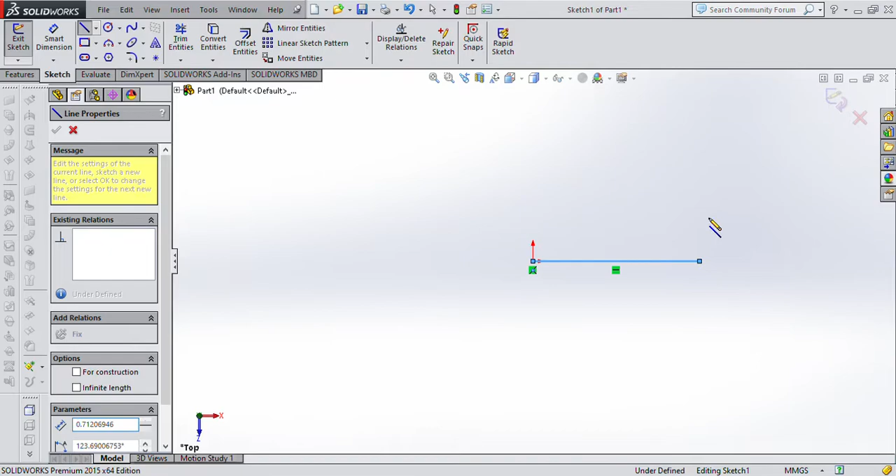Now we are going to continue with part design, and I will try to draw some parts which are a bit complicated. Open a new page and select top, normal to. Line, sketch line, start from the origin point and create this sketch. This should reach to this point.

Now fillet, sketch fillet, 12. This one here, here and here is 12.

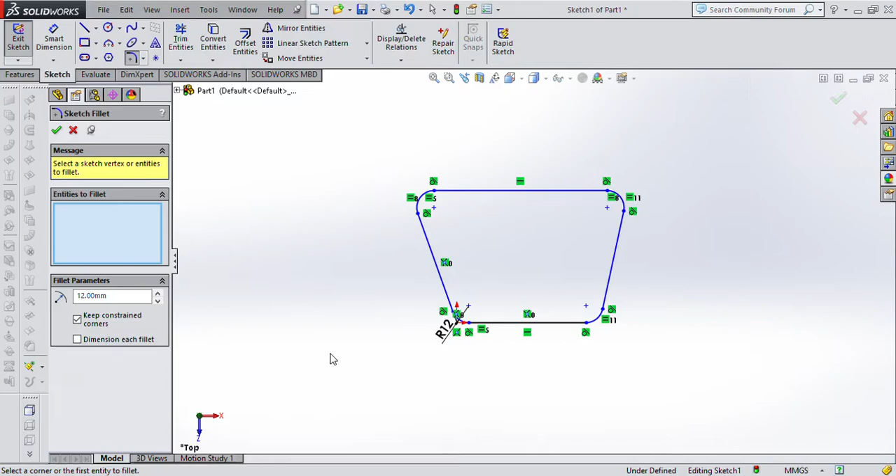Now dimension, smart dimension. Between the center of these 2 points is 84, and this one is 70.

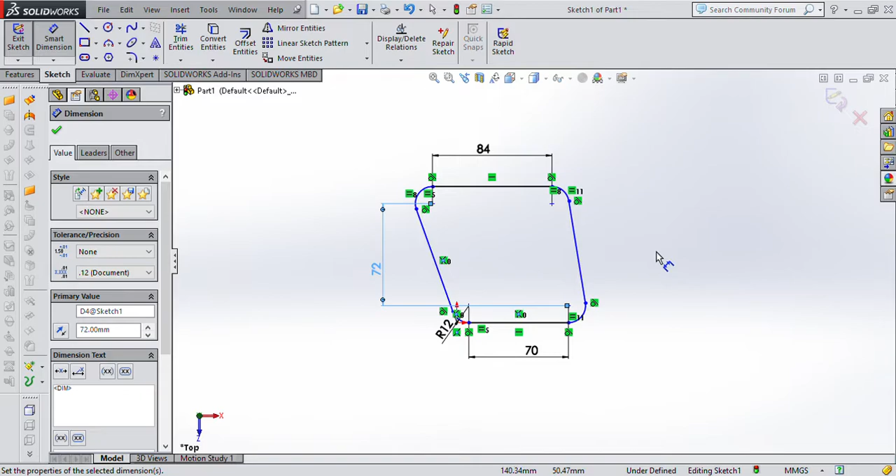Height here to here is 72. This 2 is equal. Okay, we have a sketch. This is my base sketch. It should be black.

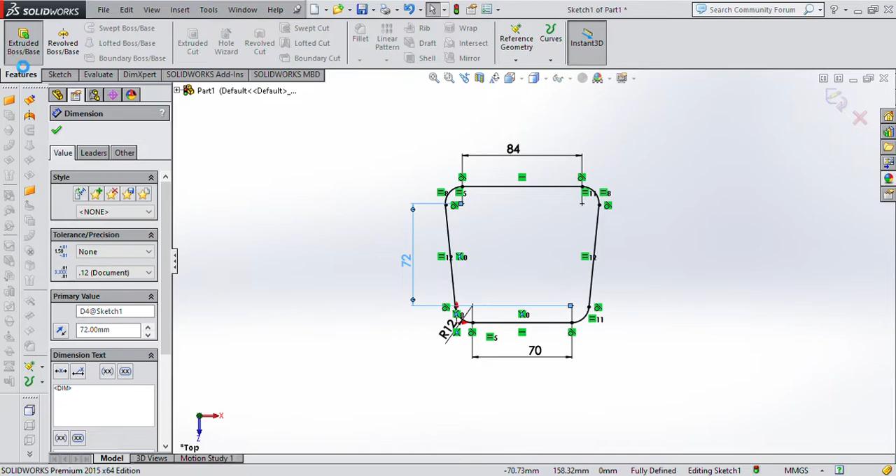Now I'm going to continue with extrude, 10, and confirm.

I have some holes here. One possible way is creating the sketch here, but since I have 4 holes, I may go to feature, new, the tool as hole wizard, feature and hole wizard. We have some choices here. I'm going to select hole.

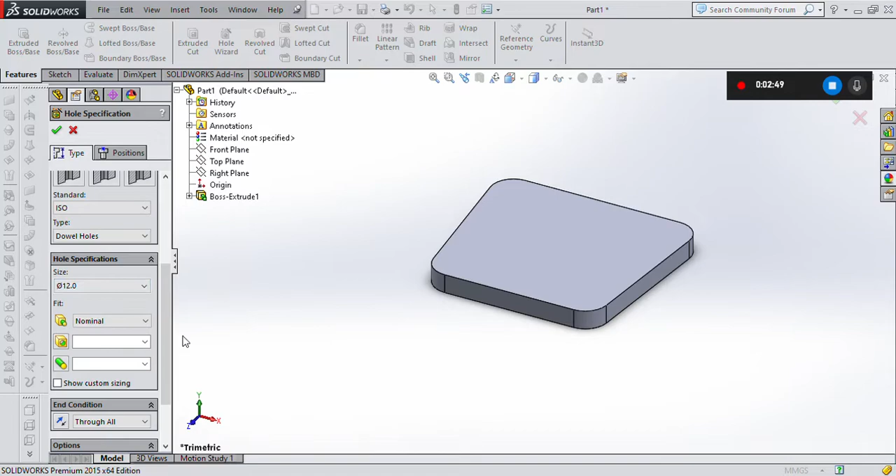The system which I'm already working with is ISO. In my case it's through all, and the size which I'm looking for is 12. So this one should be hole, this one is 12. Now go to position here, click on a point, another point, one more point and one more point.

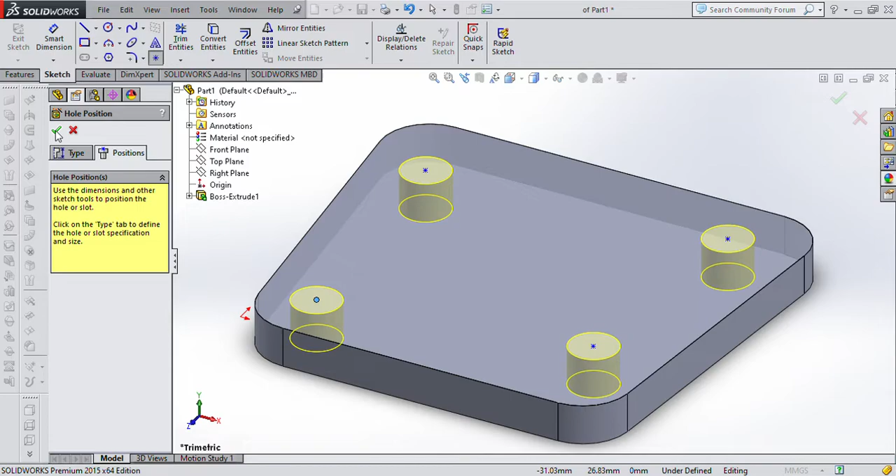When you are looking at these points, the center of the points is blue. It means that they need dimension. Just confirm your hole wizard. Now you have this feature.

Open this feature and find the first sketch of this feature. Right click on it, edit sketch. Normal to, you can see the center of the holes here. This point.

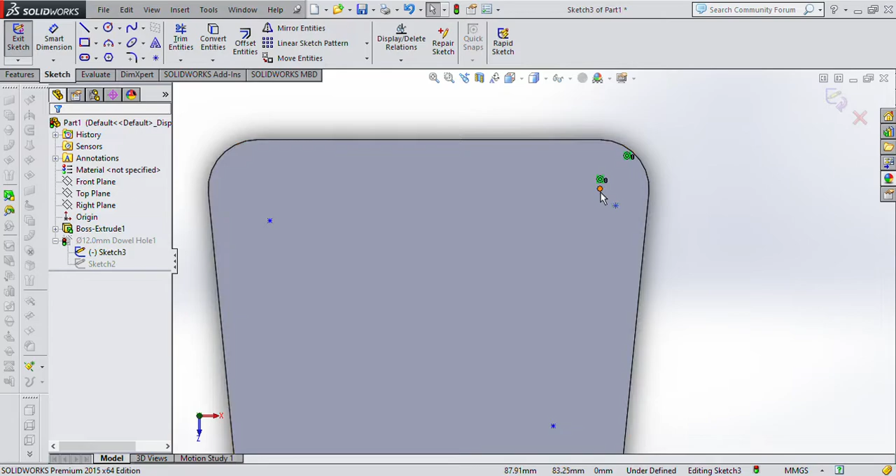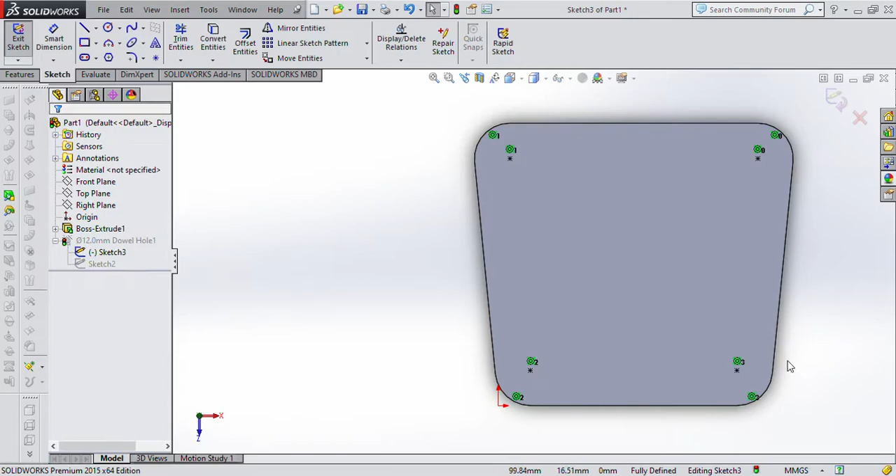Control this arc is concentric. If you do so, the color of this point will be black. It means that it's on the center of the same, it's concentric with this arc. Concentric. This one is concentric, here is concentric. All the points are concentric. You can confirm your sketch, and we have this part.

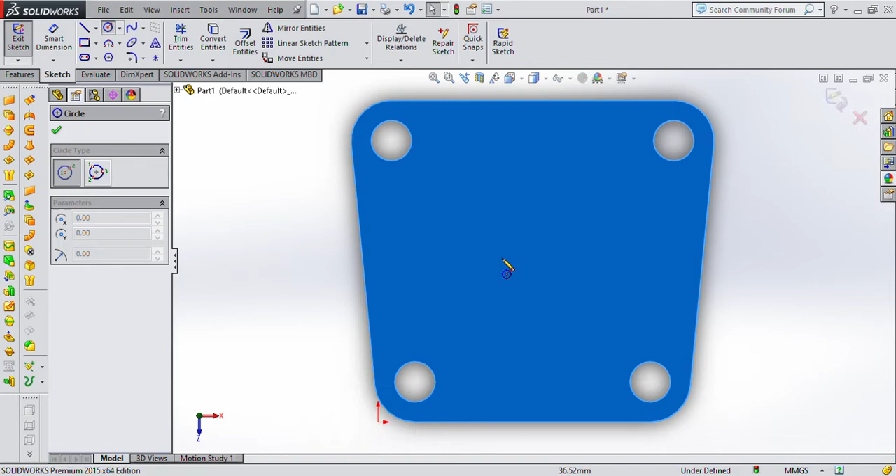Now I'm going to continue with drawing, have a look here, select here, normal to. Sketch, circle, make a circle here, dimension is 70.

Dimension between these 2 here, the height is 28, and here to here, this one to here, sorry, this one to here, this distance is given as 35. So this one is 35, here is 28.

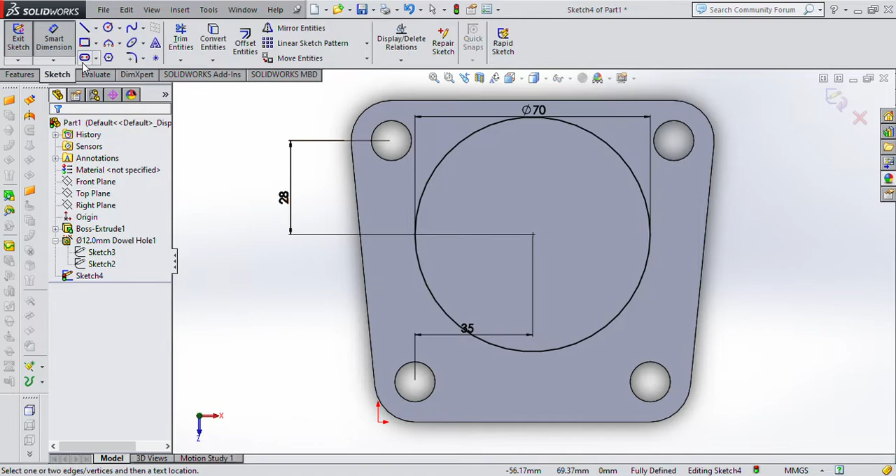Now we should extrude the part 85. ISO, extrude 85, and confirm.

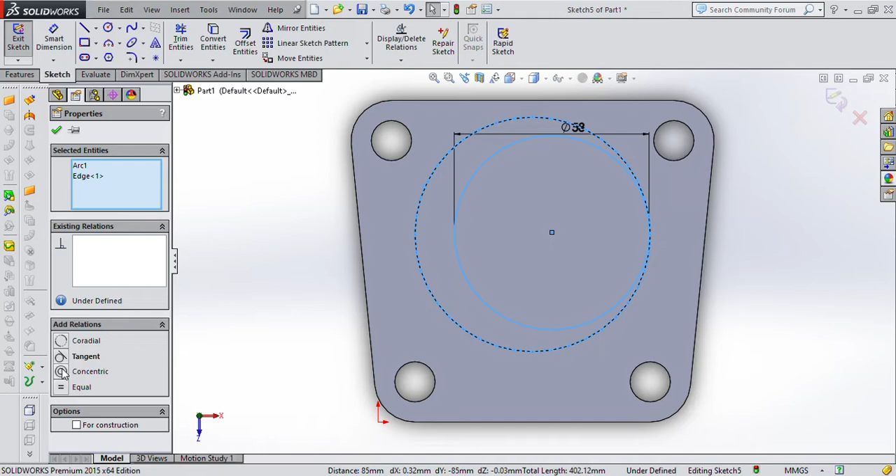Now select here normal to, sketch circle, dimension, this one is 58. Okay, and let's say this arc, this circle is concentric with this one. ISO feature, cut extrude, and let's select through all.

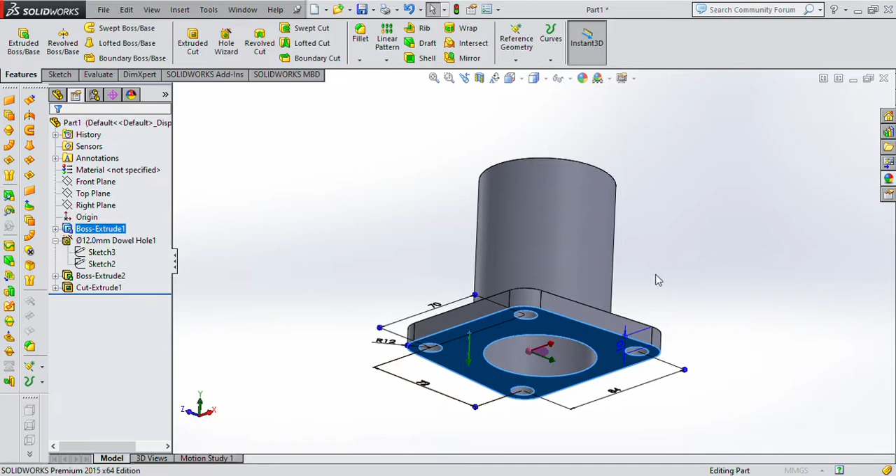Now select, rotate your model and select here reference geometry and plane. Since for the first time I'm going to create a plane, I have to wait a few seconds. Now I made a parallel plane with this plane. Firstly, you have to make a change on direction, and put distance as 50. Now as you can see here, we made a plane parallel to base, to the top plane.

Now confirm your model, and now normal to, one more time normal to, because we wanted to see the other side. This one is much better.

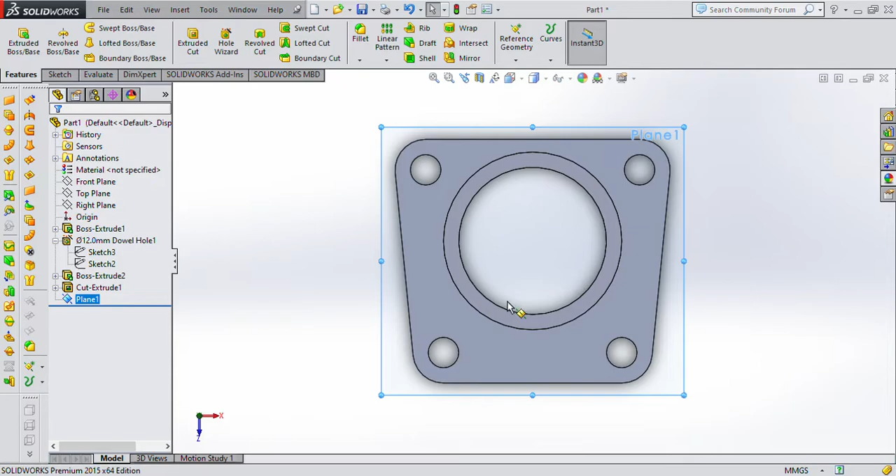Now I'm going to create a line here, from here to here to here. Be careful, this one, here is coincident. If yours is tangent, you should delete the tangency sign. Look here, this one is coincident.

Now I'm going to use fillet. The size which I'm going to create is 14. If yours is not accepting 14, you have to pick this point and raise it a bit, because maybe your size is less than 40. That's why your dimension is less than 40, and the application will not accept it. So this one is 14, and confirm.

Now we made this line and this one is tangent. If you use the fillet, definitely these two will be tangent. Now I'm gonna close this sketch, but I need the arc from here to here. One possible way is drawing this arc, but another possible way is making a copy of this arc.

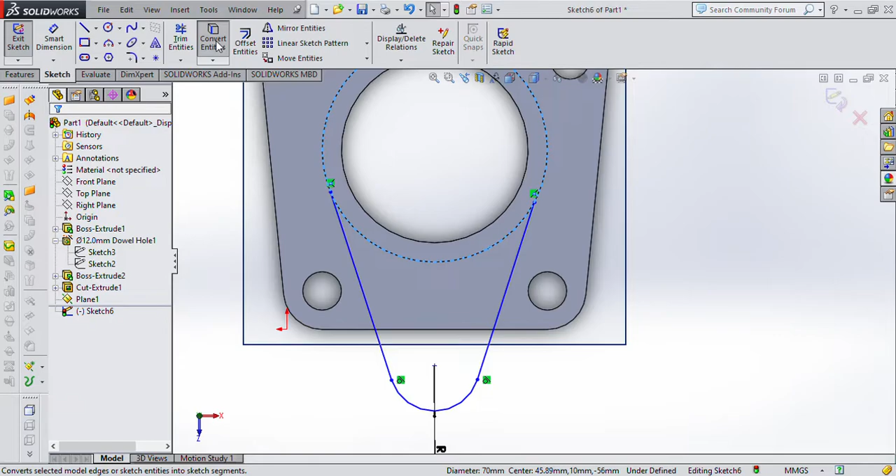Look, when I'm selecting this circle, I may click on convert entity. It means making a copy of this entity. If you do so, this one will be created. As you can see, this circle is created and the color of this circle is black.

Now I am going to say dimension. Firstly, before dimension, this point and this point is vertical, and the dimension between these two here is given as 60. I'm checking dimensions still, it's 60, one is given as 60.

Now this one is tangent to this arc, here is tangent to here. Use tangency. So these two are tangent.

Now I have a sketch here, another sketch here, but I'm gonna use only this side of the sketch. That's why I'm gonna use trim, and I have to trim this arc.

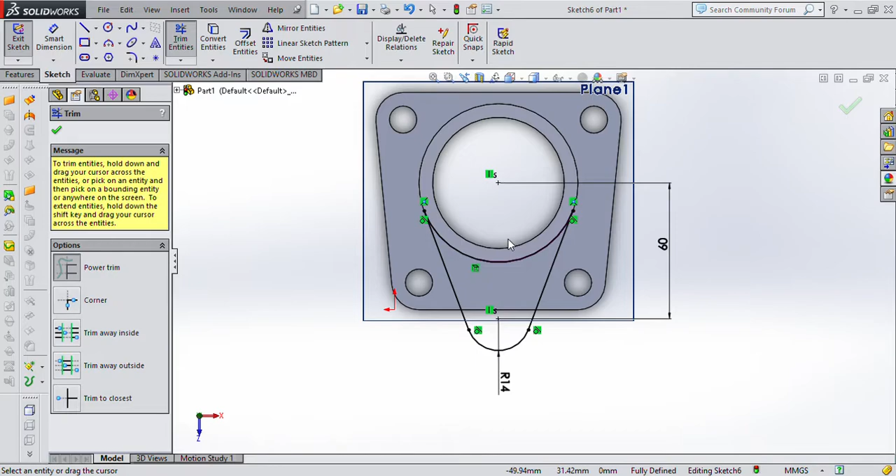So here I made a sketch in this plane, isometric. You can see this sketch. Now I'm gonna extrude this sketch as extrude 32, but not in this direction. Reverse it, reverse direction. Okay, it is 32.

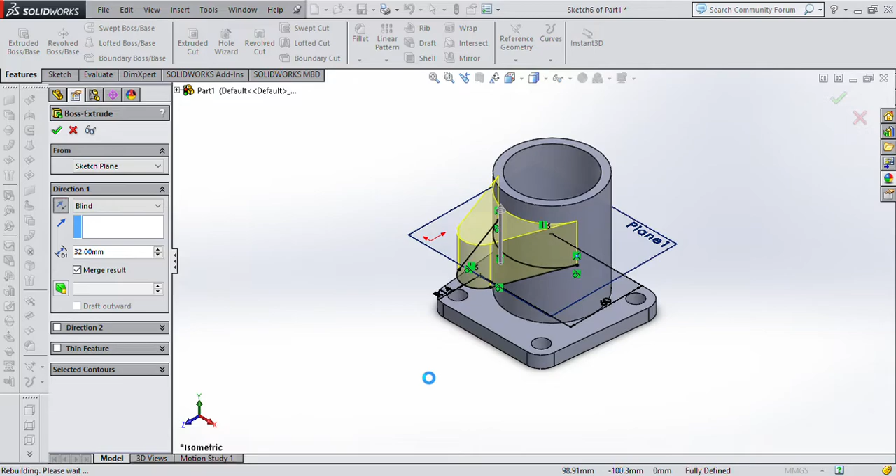Now I'm gonna hide this plane because I'm not gonna use this line again. Now let's say 14. Good, now let me do another term.

Select here, normal to line. Here I have a circle, this one is here. Dimension of this circle is given as 12.7, and this is tangent, is concentric. Isometric, and feature cut extrude, let's say through all.

Now let's select right plane. Right plane, normal to, rectangle. Make a rectangle here.

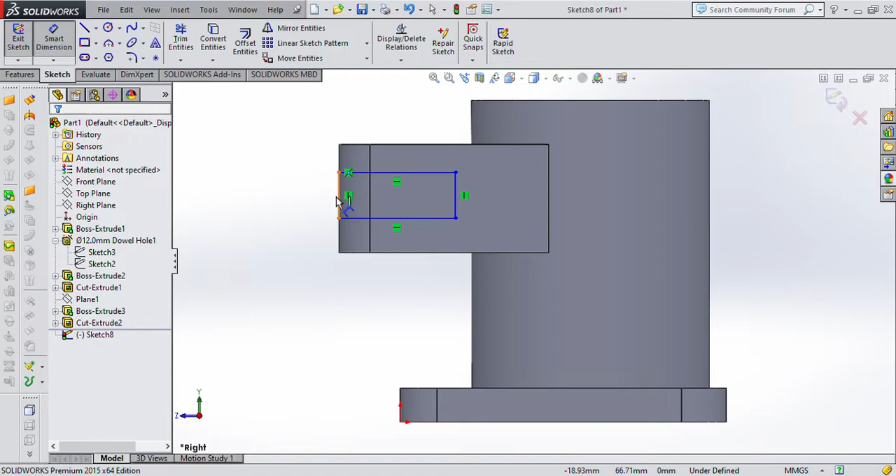This one here is given as 12.7, and between these two is 32. 32 minus 12.7 divided by 2, it is 9.65. This one is 9.65. And distance between this one and this point is given as 14 plus 22, yeah, it is 36. This one is 36.

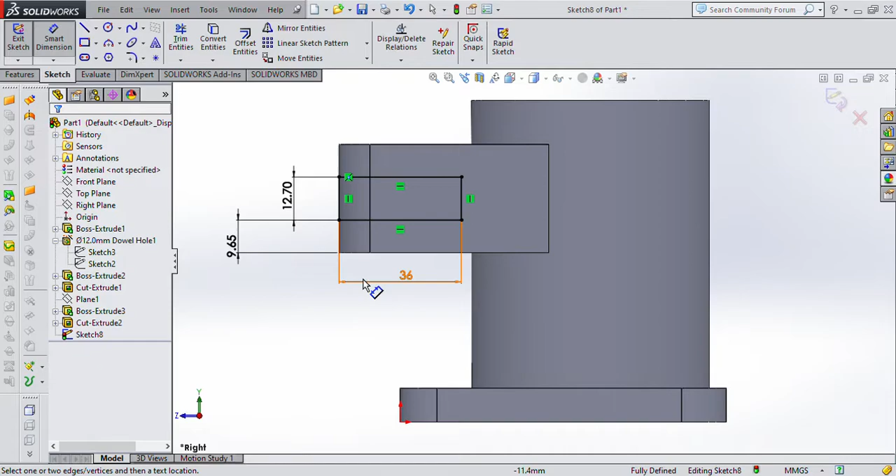Now isometric, feature cut extrude, change direction, through all.

Here in this hole I made a mistake. That's why I'm gonna delete this sketch, this feature. Select it on the tree diagram and use delete on your keyboard and delete it. Because this one is not a hole, it is an M12 thread, so I don't need this sketch.

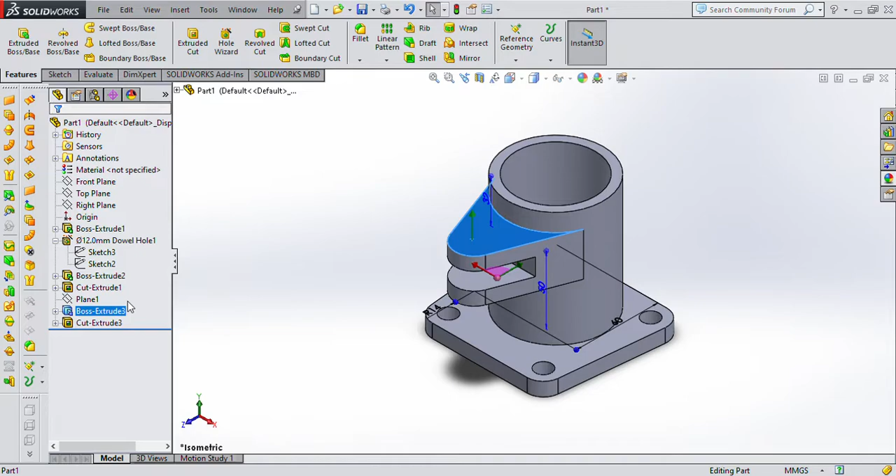Now select, so we made a delete here, just a delete of the feature and delete of the sketch. Now isometric. Look, select this plane, go to feature hole wizard.

Now this time I need a thread. The choice which I'm gonna use here, maybe this one. Tapered tap. Let's select the system which we should select is ISO. The size, no, oops, this one, sorry, straight tap. Select straight tap. System is ISO.

And size is M12, this one is M12. And for M12 we have 3 choices of pitch size: 1.25, 1.5, and the standard one for M12 is 1.75, but here we are going to select M12 itself.

It's through all, and the threads here, you can make many changes, but we don't need to apply any change. Just click on position, find the position and confirm it.

Now we made this hole, but as you can see the hole or the thread is not at a good location. That's why I'm gonna select on here, find the sketch, edit sketch. This one should be concentric with this arc. If you do so and confirm it, so this one here we have a problem.

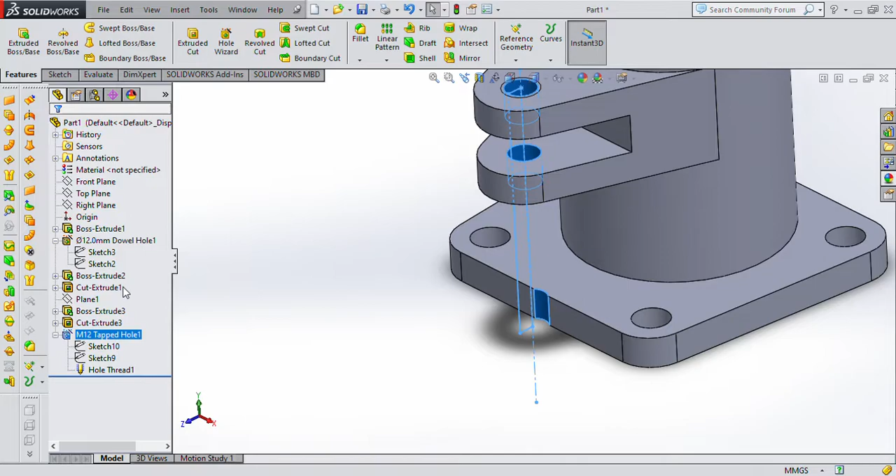This one is not through all, it's blind, and the distance we should blind it is 32. Okay, maybe a little bit more than 32. You may select 42, for example.

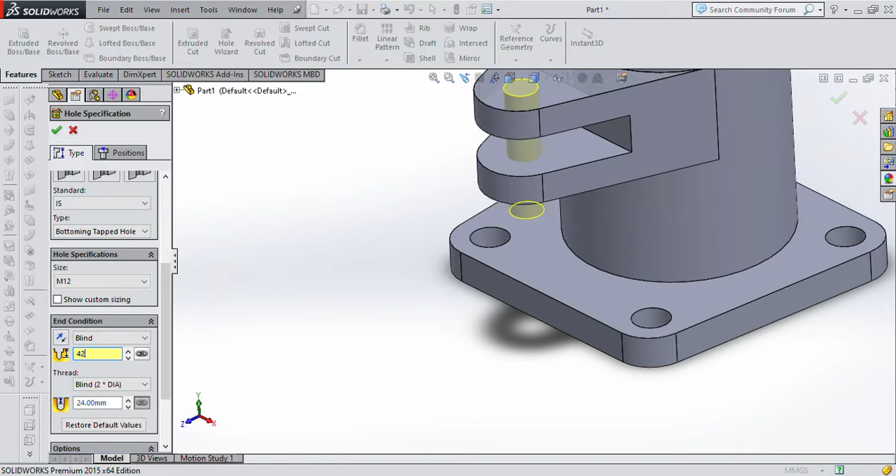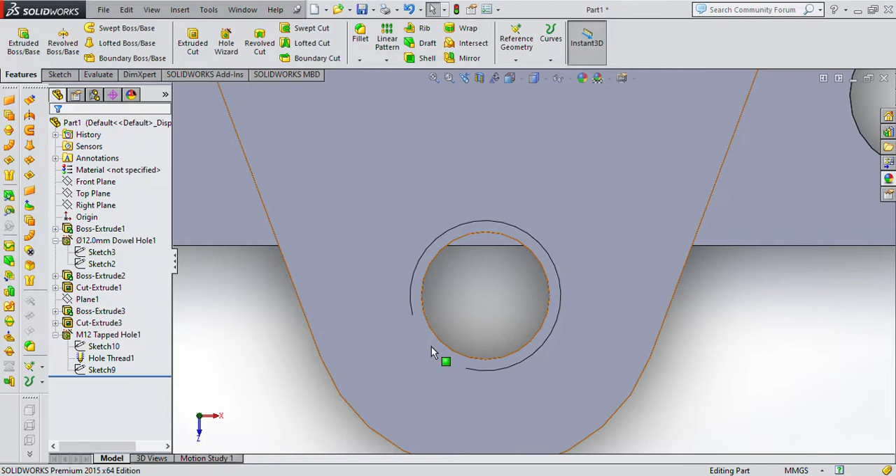Now have a look here, we have a sign here. This sign is not a full circle. Look, a quarter of this circle is not appeared on this circle. It means that in technical drawing this means there is a thread here on this hole. So we don't have a full circle here, a quarter of this circle is not appeared. That's why this one is not a full circle, it's a circle which is threaded. Okay, so isometric.

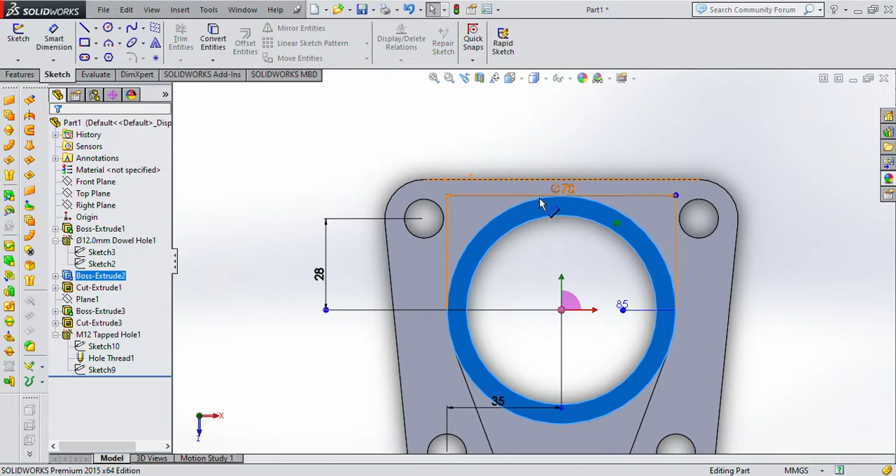Now I'm gonna continue to work on this plane, normal to, sketch, and let's draw a line. Let's use line here and make this sketch. Be careful, this one is vertical and horizontal, and click here, convert the entity. Okay, use fillet.

The size of the fillets, it seems that it's not given. Let's put as 8. This one is 8 and here is 8. Alright.

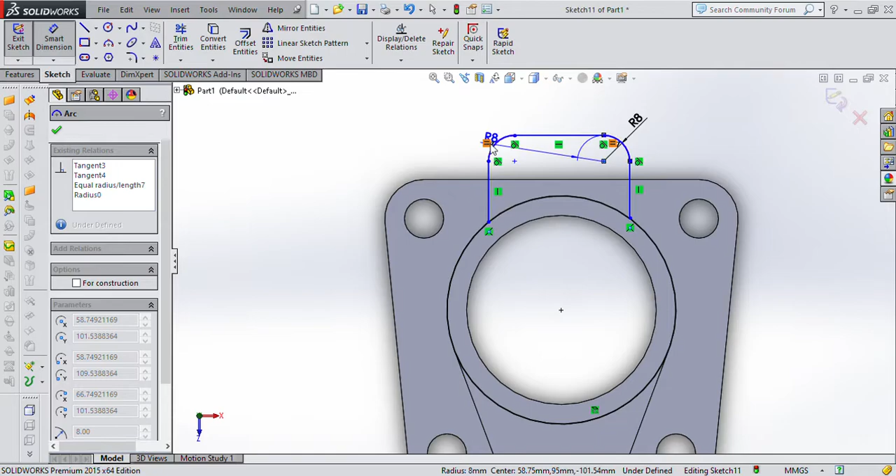Distance between these two, here and here, this distance is given as 22. Since this part is symmetric, we can select this one as 11. And distance between these two here is given as 44.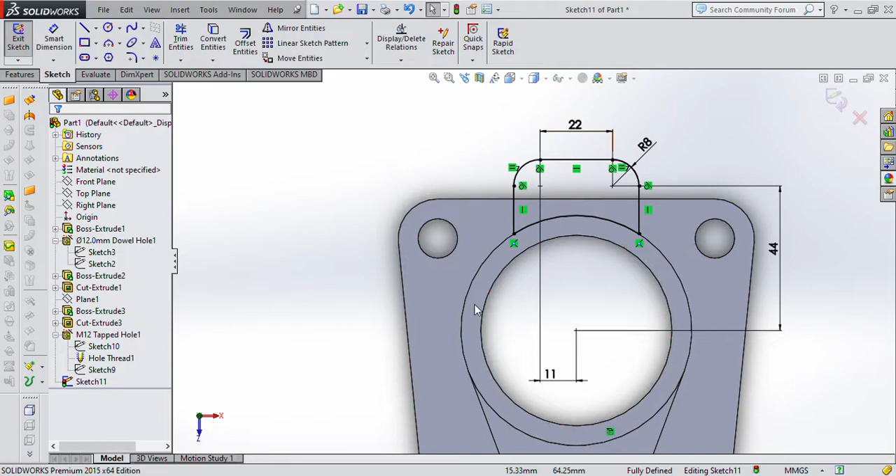Now we don't need this part of the arc, that's why I have to use trim, and I have to trim it. Now this sketch is fully defined, and we can use it for future extrusions.

Extrude, change the direction. The thickness here is given as 10. Sorry, this one is 10. Okay, and confirm.

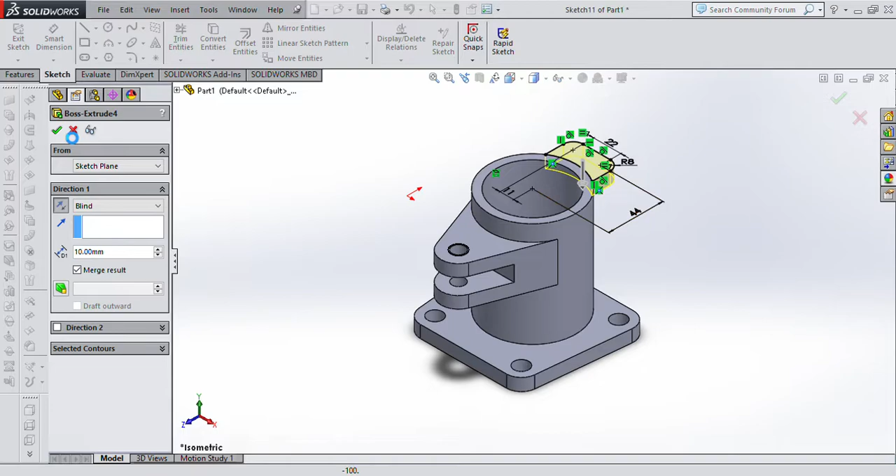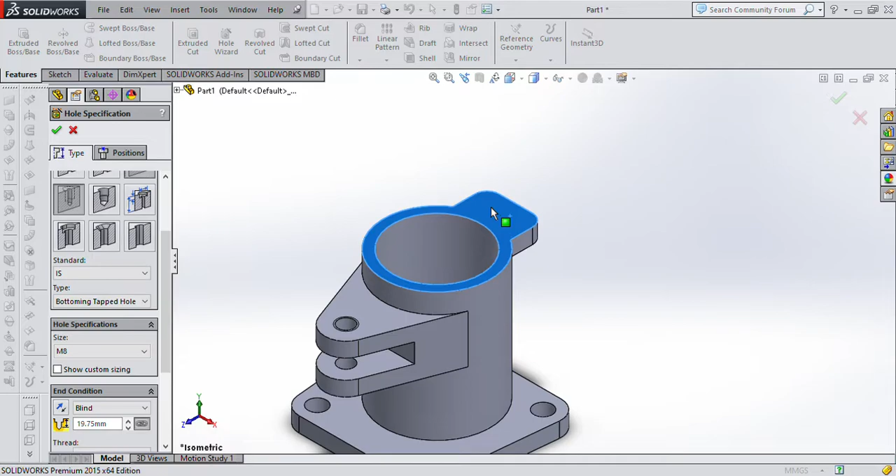Now I need some holes here, but in the paper it is given as M8. So I'm gonna select this plane, hole wizard, straight, M8. Now position, M8. Let's say this one is blind, and this one, let's say, select as 20. Position, first one and second one, confirm.

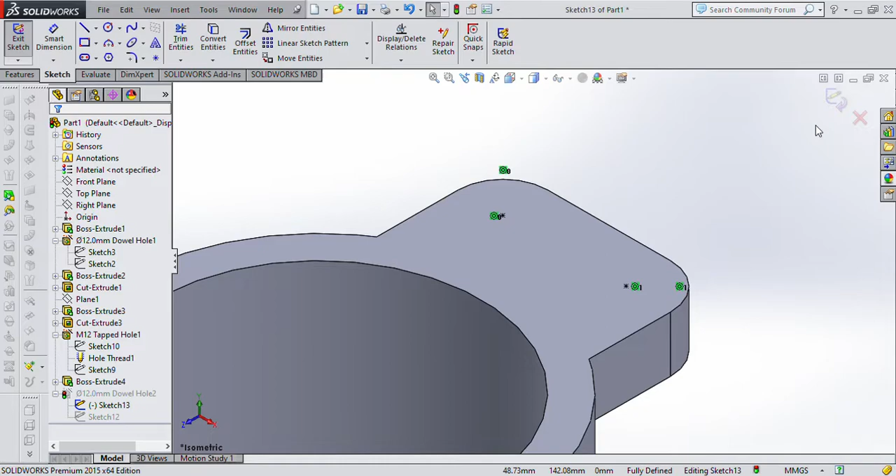Now open the hole. This one is concentric with this arc, and here is concentric with this arc. It will be black. Is that M12? Now edit, it is M8. Be careful, the size, this one is straight, and here is M8 ISO and M8. Confirm.

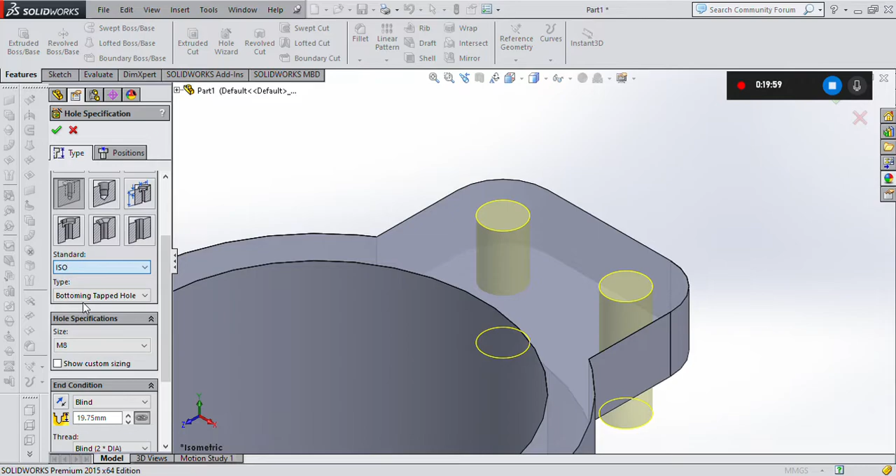Now have a look here, again here we have a thread. Okay.

I'm gonna work on this plane. Select here, plane. Change direction, 11. Sorry, 8 plus 11, it's 8 plus 11, it's 19. Edit feature, 19.

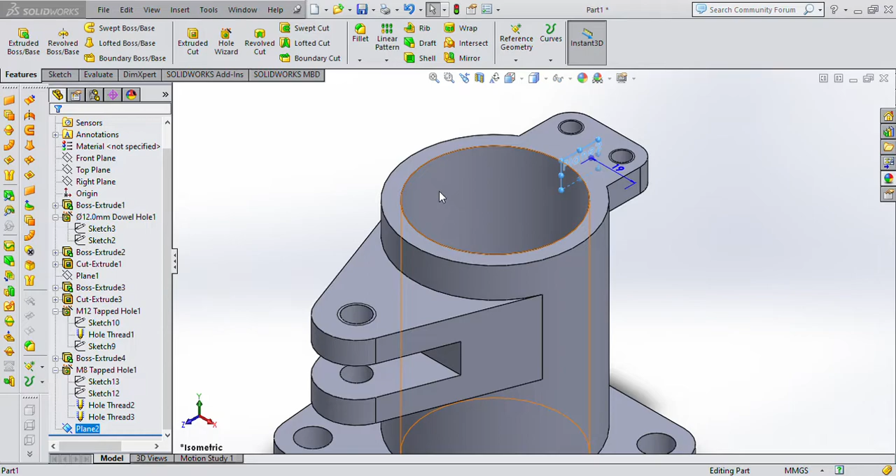Okay, it should be at the mid of this. I'm gonna have a look here and check. Yeah, it is at the mid.

Okay, now this is a plane. Select the plane, normal to. Use sketch and line. From this corner, make a line up to here.

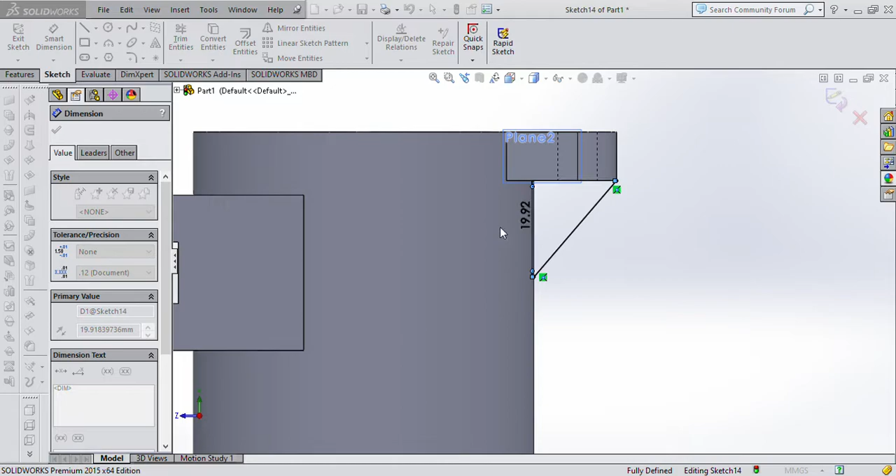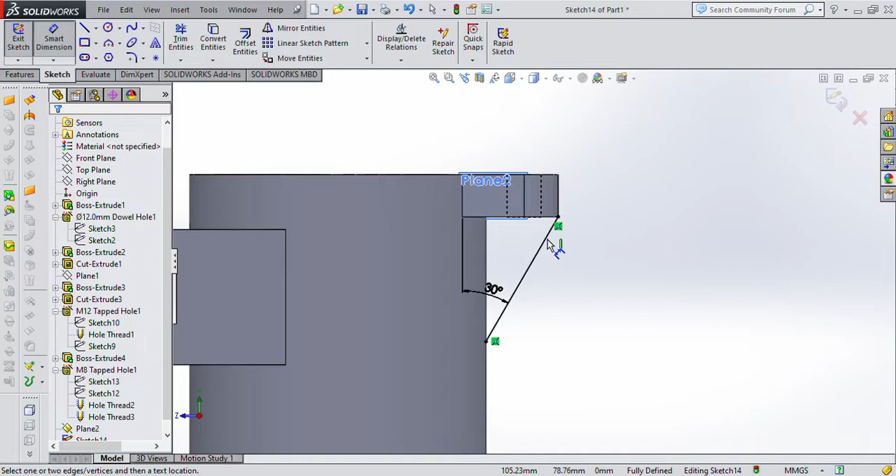Now smart dimension, just an angle between these two, here and here. No, not this one, I need an angle here. I may select this line as well because it is vertical. This angle, okay, it is 30. Okay, we have this angle. The color of this line is black, so.

Okay, have a look to this line here. Now feature and rib. The thickness of the rib on the paper unfortunately is not given. It means that this thickness is not important from a thickness point of view.

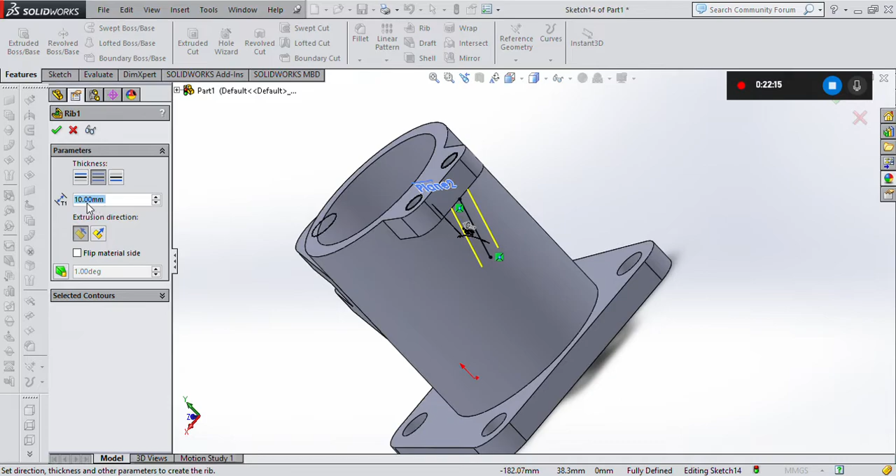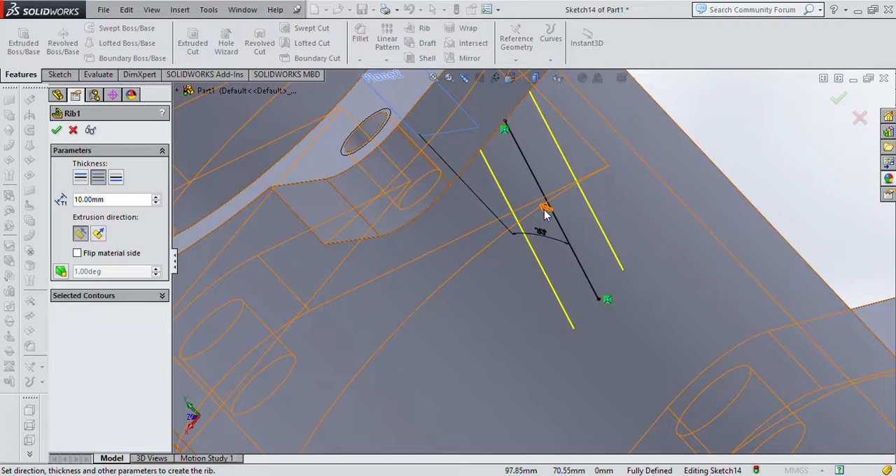I'm gonna select this 10. Be careful, this arrow should be towards the parts. If yours is in this direction, you have to click on flip material. Or you may use normal to sketch or parallel to sketch, but this arrow should be towards the part, and confirm it. You can see we made a rib here to the part.

This is a very good part actually, and now I'm gonna hide this plane, and this is a part which is given on the paper for you.